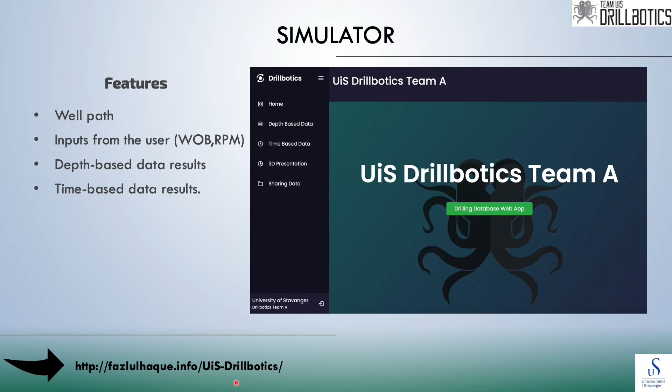Hello, so I will be describing a little bit about our graphical user interface. Here you can see for depth-based data view and time-based data view, we have shown some of the plots, and those are listed here. And for both of the views, we are also taking some inputs for flow rate, RPM, WOB, and time difference input. With the slider, we have set up a fixed range. You can slide and change the value as well, and also we have the option to change the mode, automatic and manual.

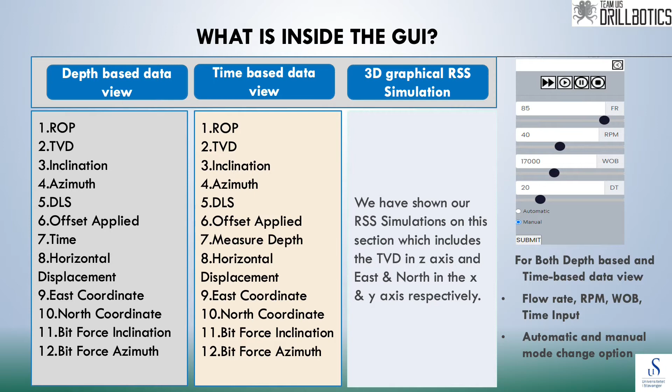There you can see the final plot output. From the drop down, you can select and deselect in the main website view. And also you can see the RSS simulations here as well.

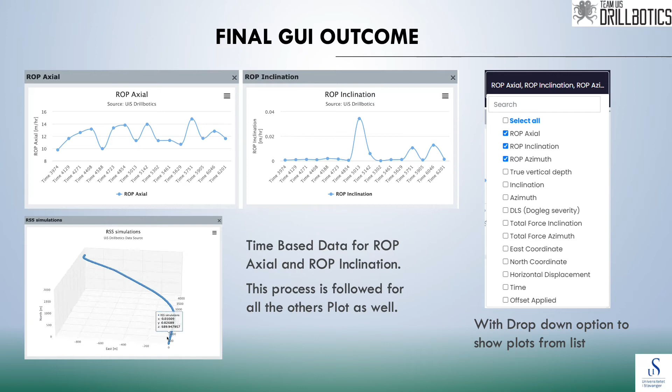And for the overall graphical user interface, we have used HTML5 and CSS3. We also use JavaScript, jQuery, and Bootstrap. And for showing the plot, we have used Highcharts, that's a JavaScript framework.

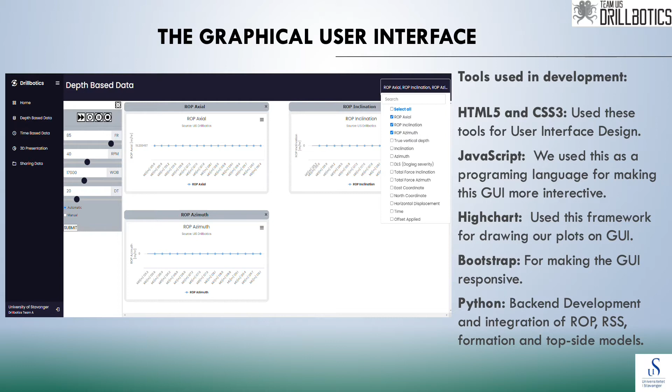The following are the models taken into consideration, starting with a stiff model for torque and drag to measure the contact force between the drill string when it's moving and deformation, for obtaining hook load and surface torque. Another model would result in calculation of bottom hole pressure. Next, ROP Bingham calculation based on formation characteristics provided. Nonlinear constraint Bingham ROP optimization based on constraints such as vibration, buckling, and maximum torque and drag.

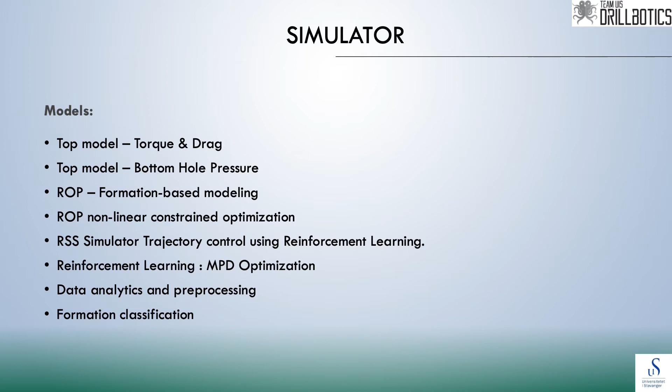RSS simulator trajectory control using reinforcement learning. MPD optimization using reinforcement learning too. Finally, data analytics and preprocessing of the output data, and formation classification based on hardness.

In Python, we developed this model using mathematical formulas to estimate accurately the torque and drag that we might experience during the drilling of the deviated proposed well. The inputs of the model are a CSV file with the trajectory of the well, and it has the azimuth, the inclination, the MD, and the TVD data from the well. Also dimensions of the pipe and its density, and the density of the mud that will be used.

The outputs of the model are two CSV files with torque and force information, which can be used in the forward step of the model. Also the data of the surface torque and the hook load will be visualized in the front end.

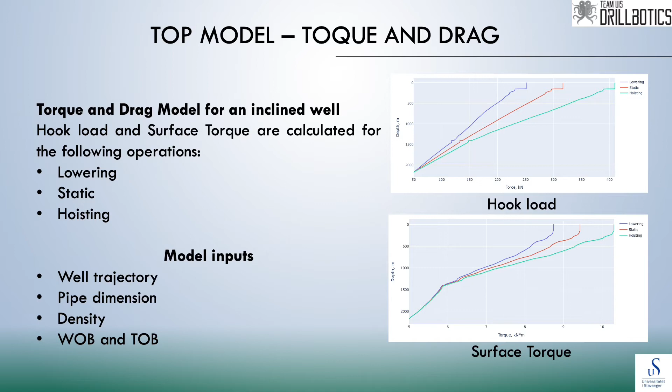The bottom hole pressure is estimated using the shooting method technique. This technique is the following. At first, we assume that our outlet pressure is, let's say, 1 bar. This is the physical boundary condition that we have to ensure that our model reaches. If a choke is, for example, present, the surface pressure will be different.

We start calculating the pressures by the deepest node. With the pressure, we assume P bottom guess and the known inlet mass rates at bottom. This can be set to 0 or to another value.

All variables are then found in this node applying conservation laws. For each segment, next node, all the way up to the surface, we calculate the pressures, superficial velocities, phase velocities, and volume fraction moving upwards. We use the momentum equation to calculate pressure in the next node using hydrostatic pressure and the friction model. The superficial velocities and the other variables are found using the two mass conservation laws combined with the slip ratio.

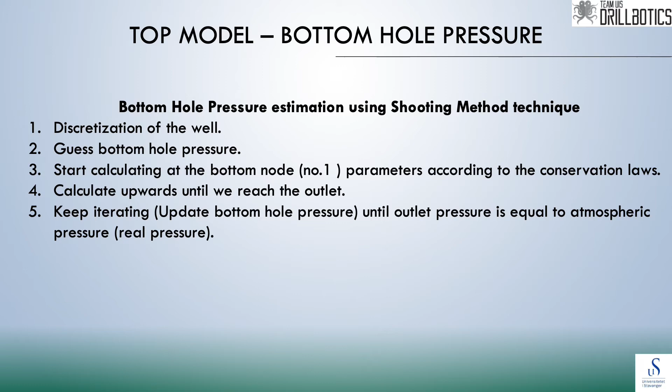In the end, with some surface rate and a surface outlet pressure, the calculated outlet pressure should be equal to the physical outlet condition, atmospheric, let's say. We can therefore define our bottom hole pressure function as P calculated surface minus P real surface. The function will be 0 if the correct bottom hole pressure is found.

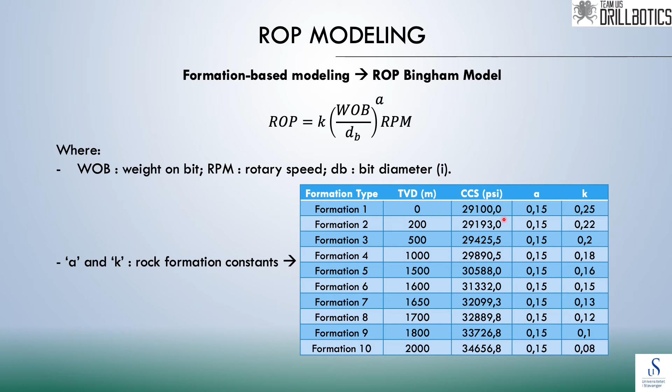ROP was modeled through the Bingham equation, based on formation features presented in the table attached, where for every depth range we will have a different drillability coefficient, K, based on our simplification that the formation gets harder and harder as indicated by the CCS value for every formation range.

The optimization of the ROP presented can not only select the optimal drilling parameters, weight on bit and RPM, and subsequently optimize ROP, but also the constraints suffered during drilling operations. The nonlinear constraint integration approximates our ROP optimization as much as possible to reality. We start with an initialized value of ROP optimization for weight on bit and RPM here, and the final result of our optimized

formation-based constraints, which will vary, stretch more, or become narrower, depending on the formation, and this result of ROP optimization will give us the optimized weight on bit and RPM, and subsequently the ROP optimized value represented here or along one of these curves.

These constraints may represent, for example, orange area, surface vibration; red area, top drive max power and backward whirl; blue area, stick slip; and green area, minimum values for weight on bit and RPM for our drilling operations.

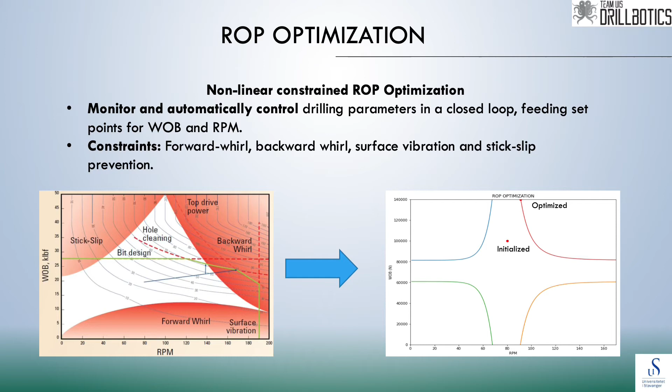RSS simulator trajectory control by reinforcement learning. Optimizing path control by reinforcement learning with varying drilling parameters as an introduction. The objectives here: seeking the best drillable path closest to the planned well path, optimizing weight on bit and RPM values through hundreds of episodes done by the agent, achieving highest ROP while controlling the path, and ultimately helping to make efficient, fast and cost-effective drilling with the aid of AI support.

Expected deliveries are a master of science thesis on a reinforcement learning assisted RSS simulator, and also implementation in the simulator in fall semester 2022.

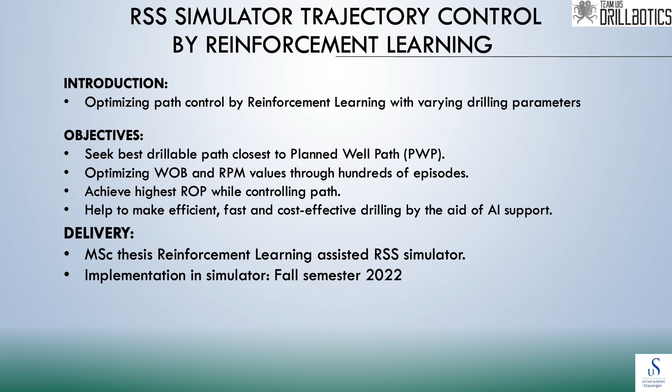In this slide, there are graphs to show the parameters' effect, showing the variances of ROP values and the differences between the PWP and the RSS paths. The first figure shows 80 kilonewtons with 100 RPM, and it is perfect matching, but the ROP is very slow. In the second figure, the weight on bit is 200 kilonewtons, RPM is 100, and it is diverted from the planned well path. The last one has the same weight on bit, but RPM is increased, and the diversion is much higher than the previous two, and the ROP is also higher.

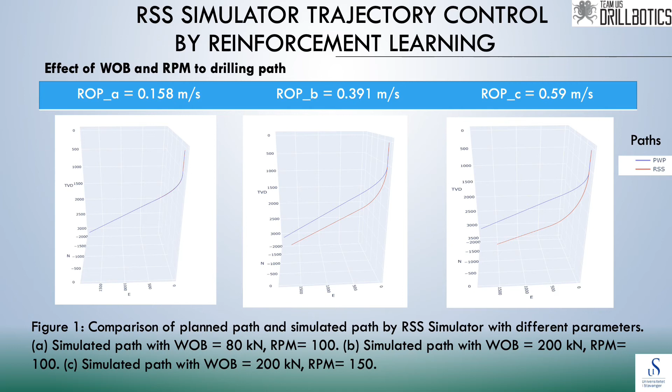This is the flowchart of this work. First, in MATLAB, we will read the survey data and create the planned well path with the shown parameters, and the reinforcement learning toolbox takes these parameters and gives them to Python, which contains the RSS function with the previous drilling matrix and weight on bit and RPM values as action. It will change weight on bit and RPM values every step, and it will iterate through the PWP matrix.

From the calculation, we will get the observations through vertical depth, north and east. Also, we will get some inputs for the reward function. These are tool-face real, tool-face drill, ROP, radius of ellipse, and dogleg severity. After calculation in the reward function, we will receive the stepwise reward, and it will return to reinforcement learning. It will run hundreds of episodes.

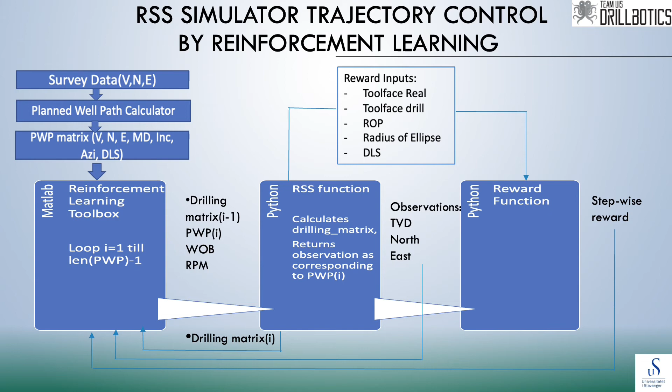Another application of reinforcement learning in our study is in the process of managed pressure drilling. The aim of this research is to explore a hybrid control system where a reinforcement learning agent can potentially add value to a control process controlled by a normal PID controller.

The objectives of the study are that the reinforcement learning agent suggests or recommends the PID set points, for example, in this case, the desired bottom hole pressure, and also tunes the gains of the PID controller, for example KP, KI, and KD, to improve the dynamic response of the PID controller, and also to improve drilling efficiency and avoid any drilling incidents which can harm our drilling process. A similar technique can be used in the optimization of ROP as well, and the reinforcement learning agent will be suggesting weight on bit and RPM in that case.

The delivery of this study is in the form of a master's thesis titled Application of Reinforcement Learning in Managed Pressure Drilling, and this will be handed in by the end of this semester. An implementation of this study in the simulator will be done in the next semester, that is the fall semester of 2022.

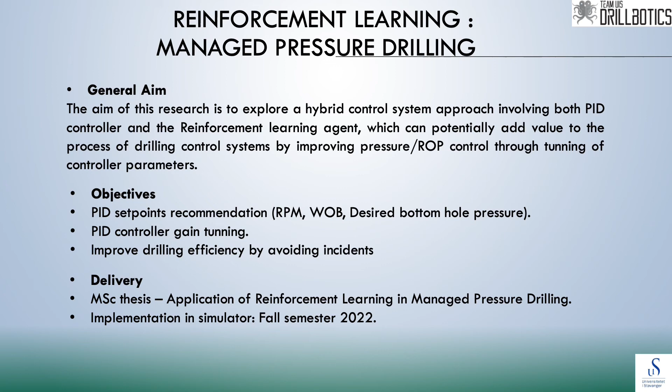The following diagram shows the schematic or the basic methodology of the process which is employed in this master's thesis. First of all, to the left, our drilling or simulation environment is based on OpenLab simulator, which is maintained by NORCE, and this is basically a physics-based simulation. The purpose of using this is to make a stable training environment for our reinforcement learning agent, where we can run various simulations in different drilling scenarios, so that we can put all the performance of our reinforcement learning agent into numbers, which we call reward in reinforcement learning.

And then a reinforcement learning agent suggests the set points to the PID controller, which can be weight on bit, RPM, and the bottom hole pressure in case of MPD, and also it tries to tune the KP and KDs of the PID controller at the same time. If this combination of actions taken by the reinforcement learning agent, which are the set points and the tuning parameters, are good, we get a very high positive reward. And if they are not good, we get a negative reward or a lower positive reward.

Once the simulation results are fed back into the reinforcement learning agent, the critic tries its best to come up with a policy or suggest a policy which gives the maximum positive reward which is possible in the current drilling scenario, and the actor obviously tries to reach that policy. And at the end of a good number of training episodes, our reinforcement learning agent has reached a policy where it has recognized which actions give the highest reward in which drilling scenarios, and the result is optimized rate of penetration and also the optimized control of MPD.

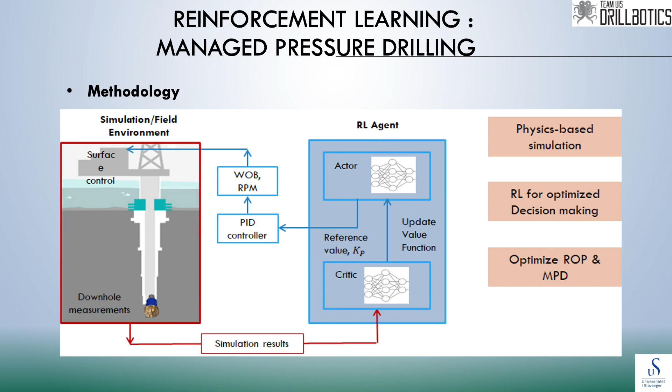Data analysis. The purpose of data analysis is to extract useful information from data and later on help in taking decisions based upon the data analysis. In our case, we will first choose our drilling data file in CSV format for the visualization and analysis on the data. After choosing our file, it will take some time depending on the size of the data file, and later it will visualize all the parameters in the data file into formats.

First format of visualization of data will be with respect to time, and the second visualization will be with respect to depth. During our visualization, we can select a specific parameter by deselecting all the other parameters, and later we can download this data and plot of this specific parameter too. In the second part of the data analysis, we are calculating numeric values of average rate of penetration, total time, and total depth. In the third part, we are plotting normal distribution bell graphs of three specific parameters: rate of penetration, ROP; RPM, revolutions per minute; and WOB, weight on bit.

And for our GUI development, we have used HTML5, CSS3, jQuery, Bootstrap, and JavaScript. And for plotting purposes, we have used the JavaScript library Highcharts. This library comes with all the tools that we needed to create data visualization.

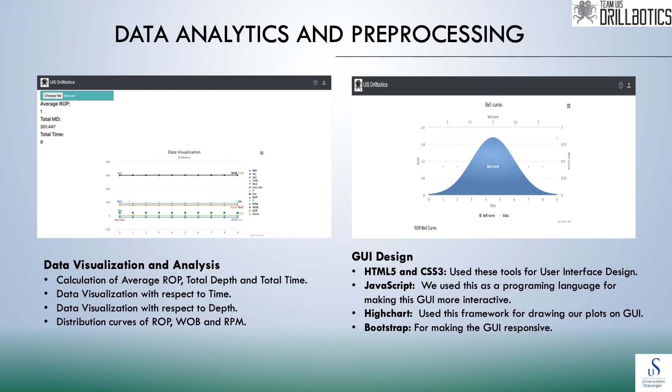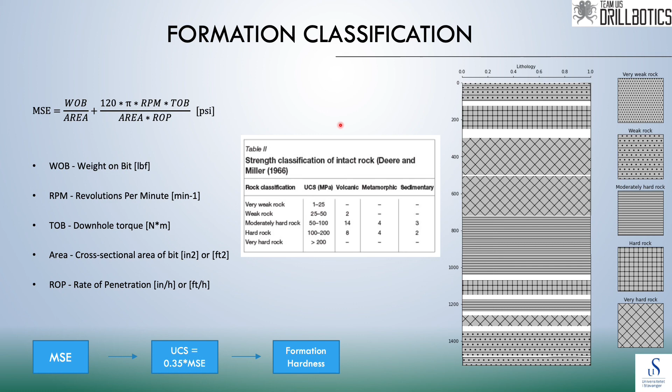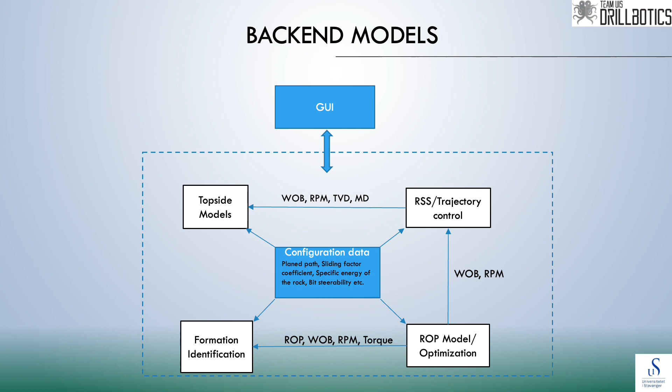Backend models include topside trajectory control, formation identification, and ROP optimization models. Software structure: the front end is connected through the API to the backend module with access to the database. For our future work, we may consider allowing the user to update or modify the trajectory once the simulation has started. Also, it would be interesting to add bottom hole assembly model development, fluid dynamics, cuttings transport, and temperature for MPD integration in our simulator. And finally, keep enhancing our web-based UI.